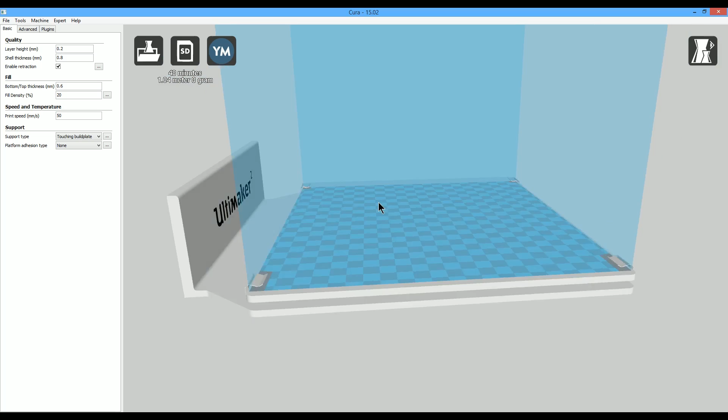All right, guys, so now we got our 3D model, so we have to move over to our slicer software. Here I'm using Cura 15.02 by Ultimaker. It's their open source slicing software that works with all G-code enabled printers. It's actually my preferred slicer.

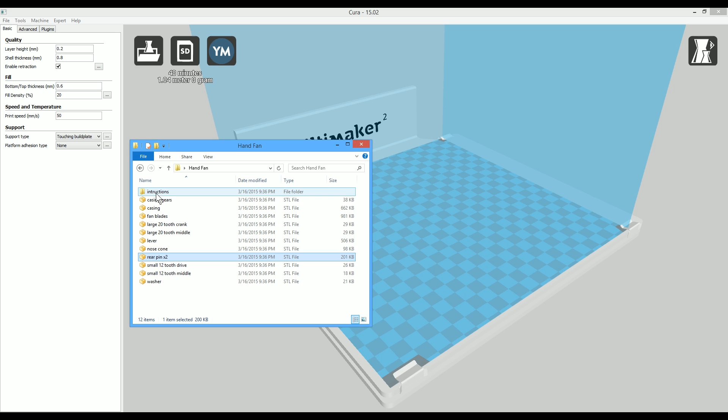So I'm gonna come over here, and I've got the archive I downloaded from MyMiniFactory, and it contains 12 separate 3D models that make up this fan. And one of them you have to print twice, so it's technically 13 parts making up this project. And just like Kirby said on his site, if you click the instructions folder, you got step-by-step pictures detailing how to assemble this thing. That's great, Kirby. A lot of people don't include that.

So if we come over here and we grab all 12 of these files and we drag them over to the build platform in Cura, it's going to go ahead and slice them. And you see we already have a problem. See the gray pieces? These don't fit on the build platform, so we can't print this all at once. So we're going to have to break it up into a couple of different prints.

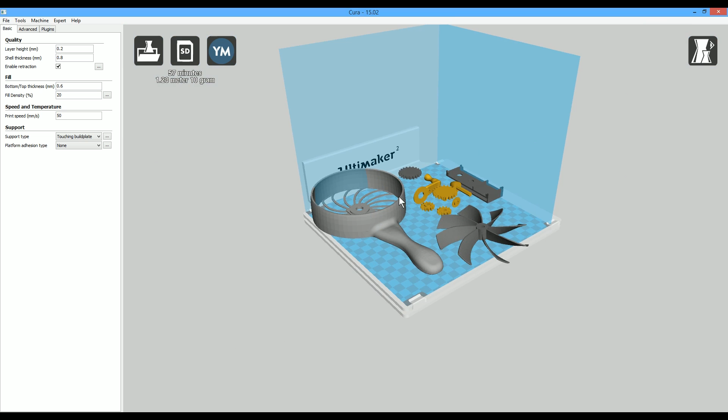So let me go ahead and clear the platform. And we're going to start off by printing the two largest things. We're going to take the casing file right here and the casing gears, and we'll move those over on the platform. Those are the two biggest, most central parts of this project. But we still run into a problem, and that is this is gray because it doesn't fit on the build platform. So we're going to come down here and just simply rotate it a couple of clicks.

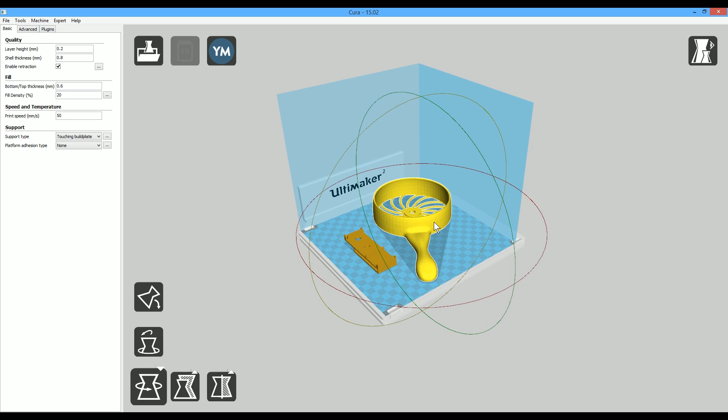And now it fits. And then we run into a problem with this, and that is when we load the part, you notice it's oriented where if we print it this way, it needs a ton of support material in between these two guys right here, and it needs a lot of support material over here also. So that's a waste of support material, and it's going to be a long cleanup. So what I think we should do instead is just simply rotate this part on its side.

Now when we print this part, what's going to happen is you're just going to have a little overhang at the top of the circles. Everything else is going to print perfectly with no support. And then I think these little nubs are so short that it's not really going to matter. I don't think they're going to need support either.

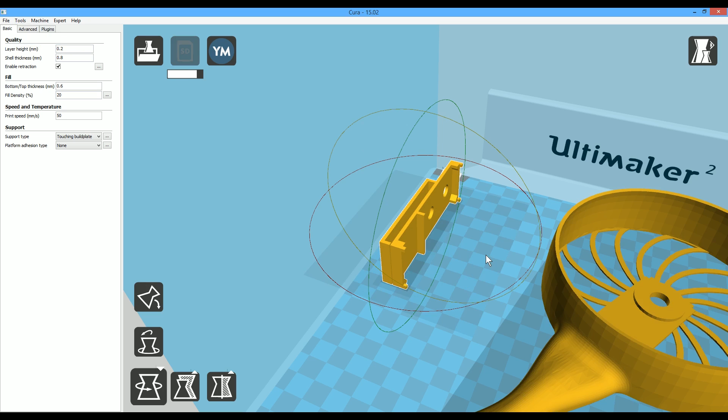One other thing I'm going to change really quick is I'm going to go up to tools and I'm going to go to print one at a time. Now what this setting does is it actually changes how the printer approaches printing this. What it would normally do is it would print a layer, move over, print that same layer, go up one, keep going back and forth until both items were printed. Well, by changing this mode, if I come over to the layers view, you can see it's going to print one item first, and then it's going to print the second item.

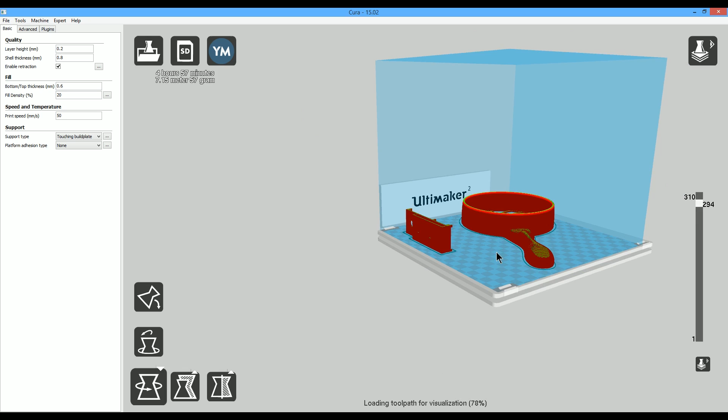And the cool thing is you get a lot higher print quality when you do this, because when it has to pick up the print head on each and every single one of the layers, it usually deposits like a little plastic booger or a little defect where it starts printing again. And it's just more that you have to clean up. So you're better off if you can do it this way.

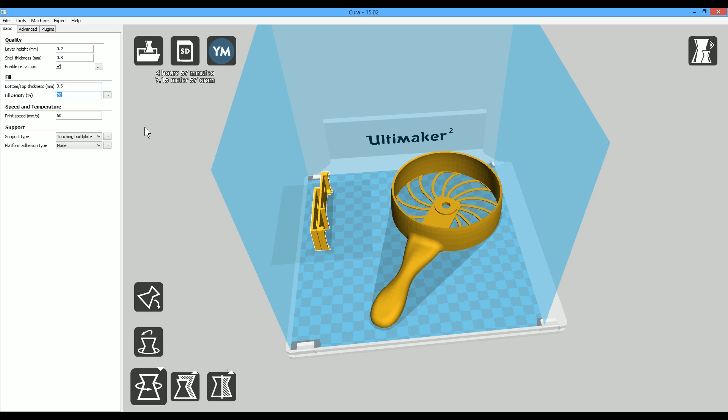All right, so printing out this model, we're actually going to use a 0.2 millimeter layer height. We're going to do a fill density of 50%. So we're changing things up a little bit and trying to make it stronger than Kirby's attempt. And we're going to print at 50 millimeters a second, which is just the default setting for the Ultimaker 2. And the material we're going to be using is called colorFabb XT, and it has a melting point of about 240 to 260 C. So we're just going to sit right in the middle at 250 for this print.

Now, once that first print is completed, we're going to have to print the remaining parts. So I'm going to go ahead and drag the last 10 parts over here to the build platform.

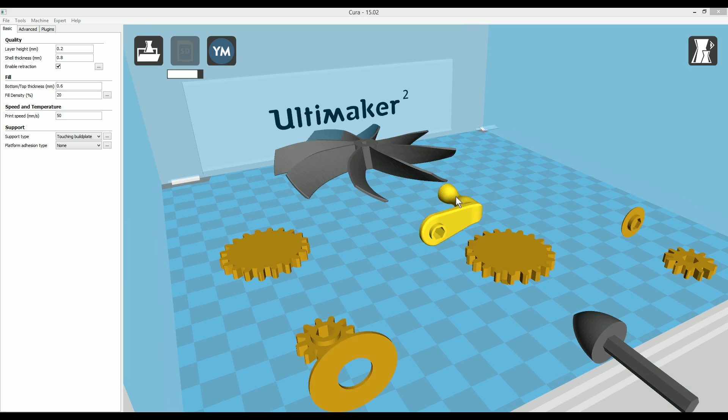And you can see they don't fit very well, and that's because we have it set up to print one at a time. This time, we're going to go ahead and compromise and say print all at once. Now, the biggest problem that we're going to run into here again is that the pieces are oriented incorrectly. So you basically have to take these gears, like this guy right here, and you're going to want to rotate it around 180 degrees. You're going to want to do the same thing with this guy right here.

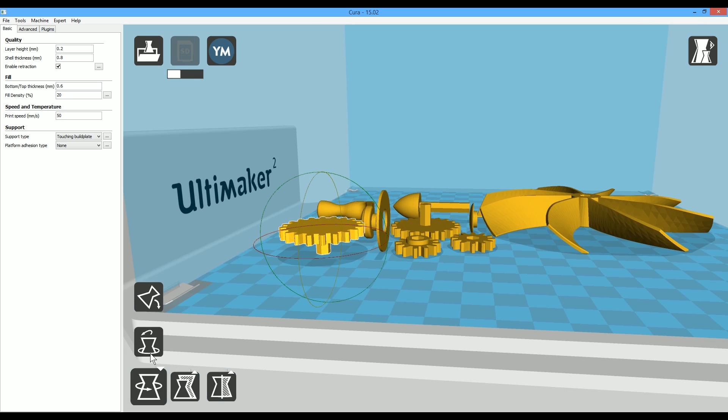You're going to want to take this cog and rotate it around 180 degrees. Same thing with the washer right here. Let's go ahead and grab the little washer. And we're going to rotate that around because you want these to lay flat, because that way they don't need any support material to print. They'll print much faster and much cleaner.

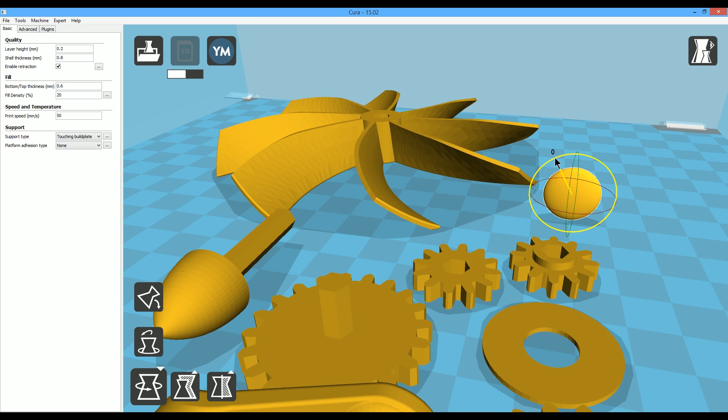Now, I have a little experience because I've already printed a couple of these out, playing around with different orientations, so I could give you guys really good information in the video. And that's how I discovered these new settings that I'm using. Like, for instance, these little end caps, I lay them on their side and I go ahead and enable support material for touching build plate. That way it just puts a little bit of support material around the rim, but it keeps this hex hole very, very clean, which is what you want.

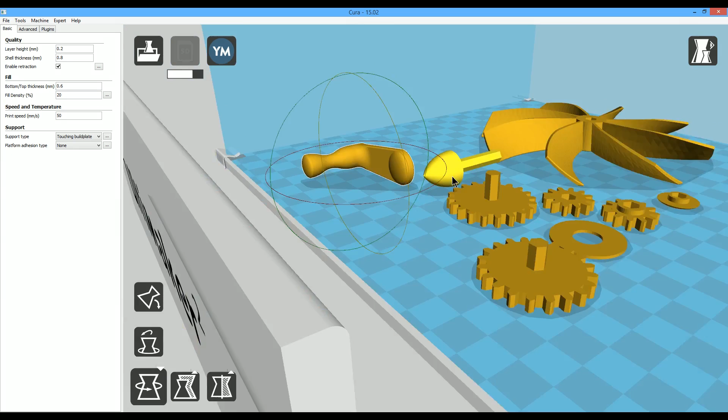Now, I played around with the handle a little bit, and I found the best way to print the handle for this particular model, at least for me, was to rotate it up on its end so that the hex nut is facing down like this. That way you just get a little support material underneath here, but it keeps the hex hole very clean. And that's what you ultimately want to do, is you want the connecting parts to fit together well.

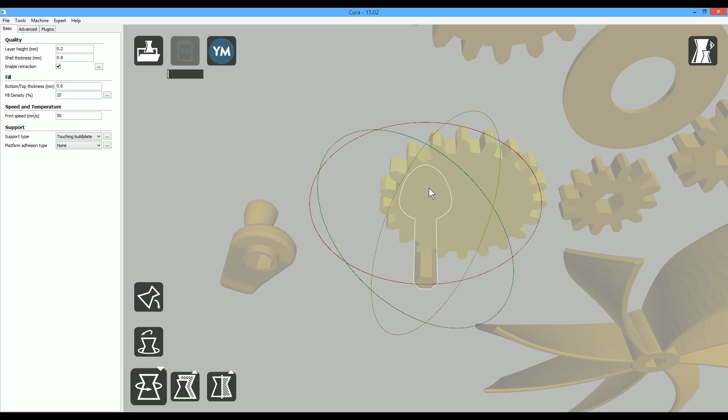And the same thing with this. I found that printing it on its side, the support material is really hard to clean away, and the cone wasn't very uniform. So instead I print it up and down, and it basically builds a little support tower underneath it, but it comes out much cleaner. All right, guys. Well, now we've got all of our parts all set. Let's get them printed out on the 3D printer and start assembly.

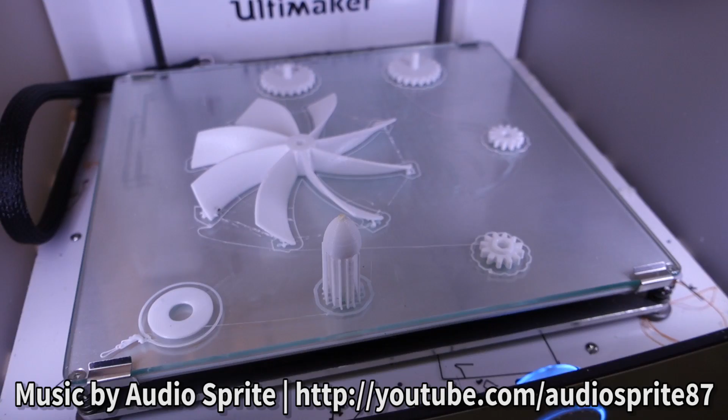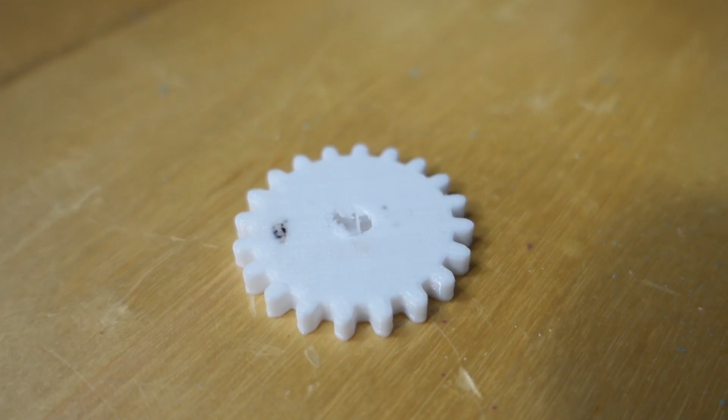All right, guys, so here we have all the 3D printed parts that we need to assemble this thing. Now, you might notice after the time lapse that a couple of the pieces are blue. Now, what happened was I had some problems 3D printing this, because when I first started, I was using a 15% infill on the parts, and this is what I ended up with. I got these little cogs and gears, but you can see they weren't strong enough. I actually broke a pin off of this cog right here. And had some other problems with the handle cracking because it was too brittle at 15% infill.

So I took all the 15% infill parts that were a part of the mechanical systems, and changed them out with 100% infill, and I figured while I was doing it, I'd do it as a different color. That way I could tell which parts were 100% and which parts weren't. So I printed out all of the parts that have tension on them. Like, for instance, the hand crank has a lot of tension on it. This piece, the spline that turns the fan, has a lot of tension on it. I don't really know why I have 2 hand cranks, but we'll figure that out later.

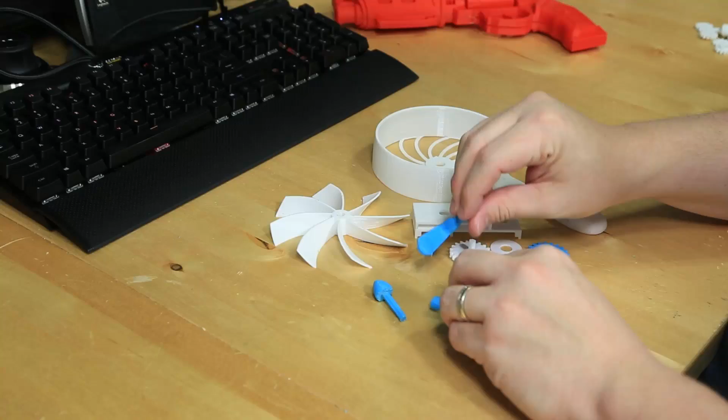I also have 2 little cogs right here that are 100% infill, and then the 2 big cogs that are 100% infill. Now, all of the white pieces here are printed in colorFabb XT material, which is amazing. It's a very high melting point material that you can use that's much like ABS, and it's very strong compared to just PLA. Now, these blue pieces here are printed with Ultimaker PLA, which has a way lower melting point, but I figured this isn't going to be exposed to any drastic amounts of heat, and I'm not printing it in black, so I figure it'll be fine.

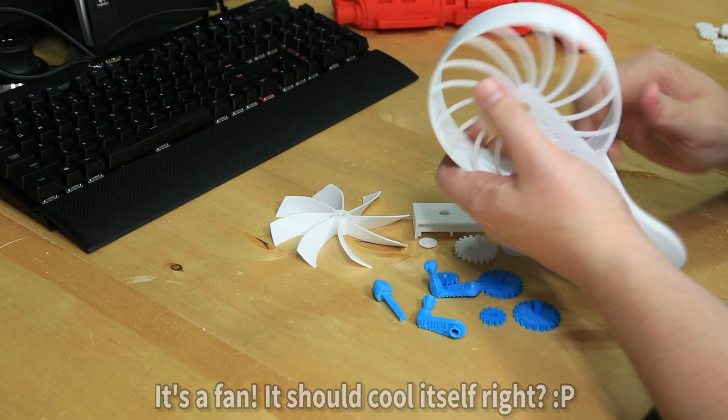Now, another problem I ran into printing the fan was, you notice some of these little pieces on the back here broke.

And I can just re-glue them, that's not a problem, but when Kirby made the model, he made these incredibly thin and delicate. If it was printed in ABS, I don't think it'd be a problem because there'd be more flex to it, but while I was torquing on it, doing the test assembly of the fan, I actually did break those. So we're going to go ahead and glue those during the final assembly.

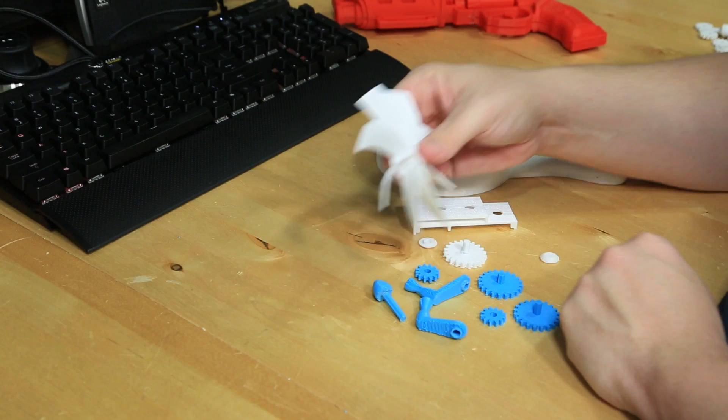Alright, to put this bad boy together, you start out with this guy, obviously, but we want to take the fan blades, and you want to put a washer. You 3D print this little washer right here. You want to make sure you get it in there, because if you don't put the washer in there, you get too much friction, and it doesn't turn. So now that we've got the washer in there, we're going to go ahead and put the spline through. That's this little blue guy right here in the nose cone.

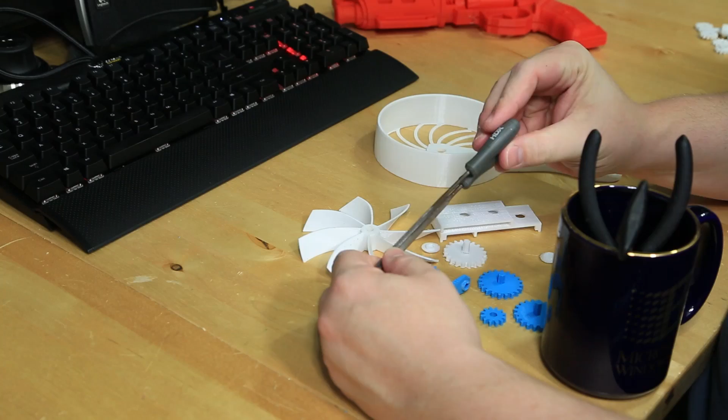So one thing I noticed when I first assembled this was things didn't fit together quite right, and it's because Kirby modeled this to very, very tight tolerances. So what I recommend is get yourself some tools. I use these little files right here that I just picked up. They're HDX files. I got them from Harbor Freight, I believe, or Home Depot, or one of those places. And I also picked up a pair of pliers, and I was just using some random thing here as a punch to separate parts.

So what I generally do is I get a couple of files that are different shapes, and when parts don't fit well together, I just take the file, run it down, and clean up the edges, and get some of the debris and some of the little boogers that sometimes happen during 3D printing, clean those out. And then I'll do the same thing for parts like this, where I printed it and it had support material on it. You can see where the support material connected to the center of the shaft. I use a flat file and I clean that up.

Now, I already cleaned these pieces up a little bit. I could be a little bit more meticulous, but you can tell where the support material was under that little guy in particular. It's pretty rough, so you want to clean that up.

Alright, it's time to assemble this bad boy. So what you want to do is take your fan blade here, your little impeller, and then take this little washer and put it on the back side of it, because you definitely need the washer. If you don't, you get too much friction. And then we're going to put the spline through on the front here. It doesn't really matter which way you put the fan on, because either way you can just spin the handle the opposite direction and get the same effect. So now we've got the blade, we've got the spline on. Now we're going to go ahead and put it in through the back of this.

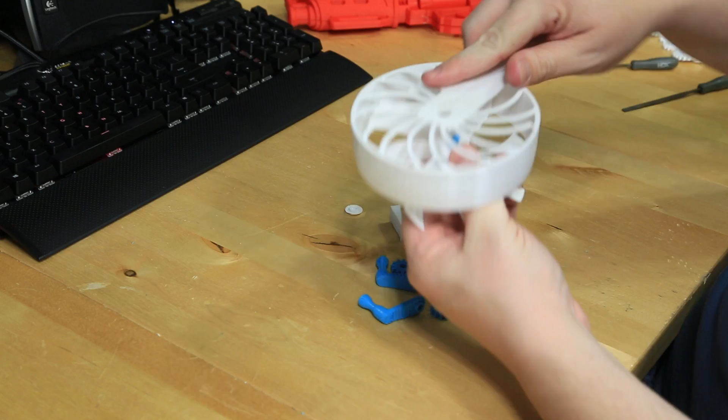And then we've got to grab this little cog here. It's the one that has a little lip on the top of it, and that's actually the bushing that holds everything straight. So once you push all those parts together, and it may take a little force, there we go. So that bushing now keeps the fan blade centered as it's turning so it doesn't hit the housing. And you can see it spins nice and free. That is a really, really good sign.

Alright, so now that that piece is assembled, we're going to take this. This is the gearbox right here. This is where all the magic happens. Now, I 3D printed 2 gears here. You can see one has a shaft that's slightly longer than the other one. So we want to take the one with the really long shaft. I know that sounds wildly inappropriate, but just trust me on this one. And see, it goes up through the little center hole there.

Now, there's another cog that you need to line up with it. So you basically put this cog in between like this. I usually just get it lined up using a file or a little pick or something like that. Then you just want to put this guy up through the bottom.

And now you can see those 2 pieces connect up through there. And then I 3D printed these little cap pieces. And these little cap pieces just act as bushings and hold it in place. So we're going to go ahead and push one of those on. But the problem that I noticed with this is if you spin it, the cap will eventually fall off. It doesn't hold on very well. So we're going to actually glue a lot of this when we're done assembling it.

So go ahead and put that cap on. So now that piece, notice it doesn't move around. It just spins on its little axis. That's perfect. Now we want to take the other big cog, and these 2 pieces separate. They bend. Don't bend them too far because they will break. So let's go ahead and put that in there. And now you can see all of the gears mesh together.

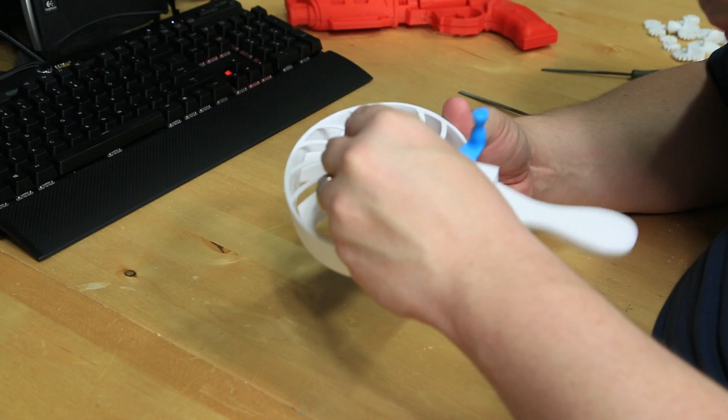And now if you look in the back here, you can see all of those gears line up from the handle, the big gear, to the little gear, to the second big gear, and then the second little gear on there. And then the only thing left to do is take the final cap and put it over the little drive shaft. And as you can see, the cap does not want to grip on there very well. Let me try one of my blue caps. I actually printed it with a little bit thicker Z-axis so it'd go further down in the hole. And it actually looks like that holds much better. So let's go ahead and replace those.

I'm going to take the white ones off. All I did for these, Kirby, if you're watching, is I just extended the Z-axis by like an extra 0.5 millimeter, just to make them a little thicker so that they went down on the shaft just a little bit more.

I swear you can't say shaft without sounding dirty.

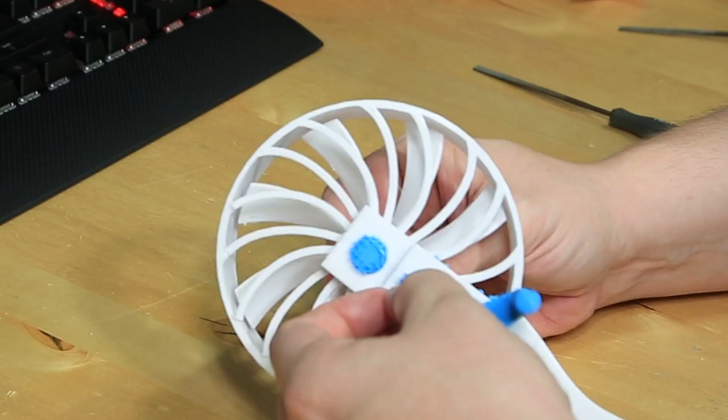Now, as you can see, when I turn the fan, the handle turns. That is a good sign. That means all the gears are meshing. So now let's see if we can turn the handle and turn the fan. And see, it's binding a little bit. See, and it's kind of falling apart because it's not glued. Let's go ahead and just get it to where it'll actually turn. You do kind of want the gears to be a little bit loose fitting, because if they're not, they do bind. So look at that.

The fan is turning. Go the other direction. Okay, so that's our assembled fan right there. Now what we're going to do is we're going to get the hot glue gun and fix a lot of this stuff, and we're going to glue the back down to the rig, and we're also going to do some gluing in here just to make this thing completely solid and function as expected. Okay, so the first thing that I'm going to glue is I'm going to fix the fan shroud where all the blades broke.

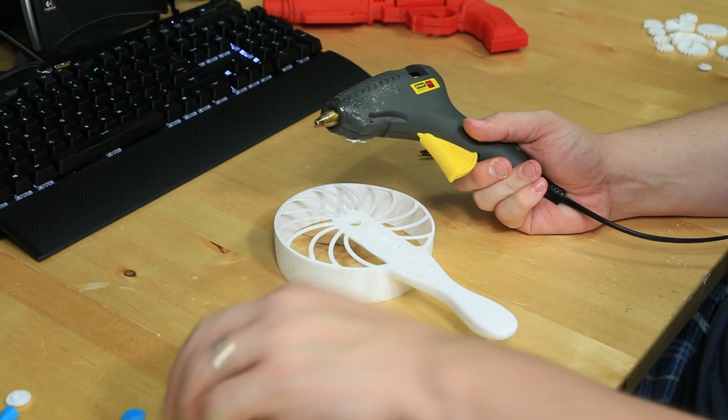Now the cool thing about printing in the colorFabb XT material is it has a much higher melting point, so using hot glue with it actually is easy to do. Now with the PLA, you tend to have a little bit of melting problem because the PLA has such a low melting point. But if you just use a little dab, it'll be fine. So let's go ahead and just dab the back of these guys. Alright, well, it might not look super pretty, but I've got everything all glued into place. So now my grill isn't going anywhere.

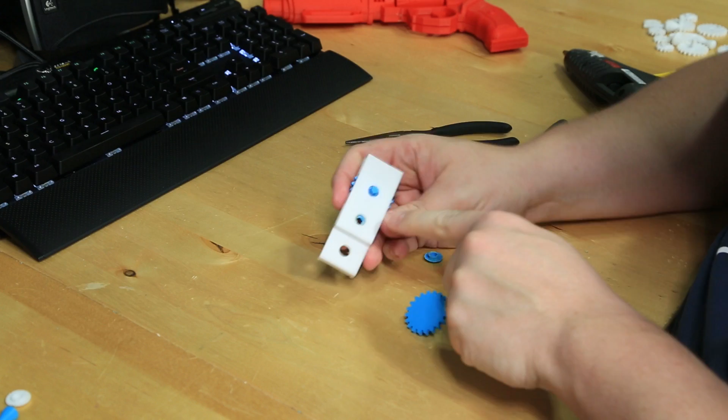Alright, now that that's done, let's go ahead and focus on the gearbox. So let me go ahead and reassemble my gearbox here. And then we want to glue the cap on. Now you want to be careful because you don't want to glue it to the structure, otherwise the gear won't spin. So let's go ahead and just put a tiny, tiny little dab of glue. Okay, that was probably a little bit more than tiny. Alright, well I made the mistake and used too much glue, and it actually welded the gear in place, so now I gotta break that free.

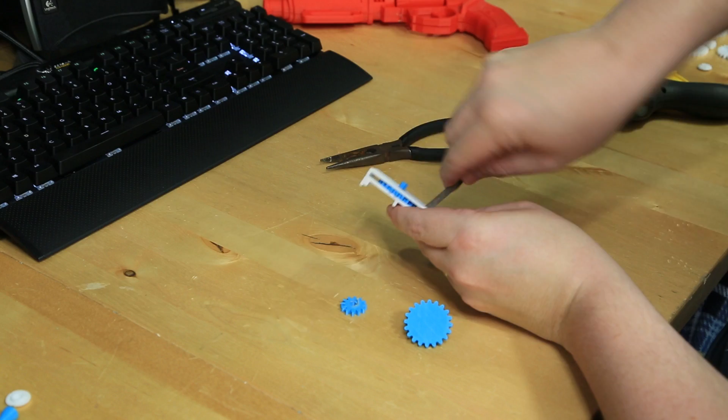Alright, so now I got a little hot glue on the outside of that hole, which is gonna drag on that gear, so I need to clean that out. So I'm just gonna use my file and scrape. A lot of glue got up under the edge too, so you just want to make sure you get all that out. Basically, don't make this mistake. I show you the mistake so you guys don't have to make it. Now, I kind of wish I had super glue, because I think super glue would be much better suited to this, because the hot glue, there's just so much of it.

Let's go ahead and make sure the cap and hood still fit together. And turn. They do. Alright, this time I'm just going to put a tiny, tiny little dab on top of the gear. Like super tiny. There we go. The problem with hot glue is you have to move pretty quick because it solidifies very quickly. Alright, that's much better. I'm going to go ahead and turn that. And I'm going to keep turning it until it sets, just to make sure if there is any glue in there, it doesn't set up and grab the wall.

See, as long as that's turning, we're good up there at the top. See the cap's turning? That's good. You can see the gearbox turns. It gets looser as you turn it more because it basically is wearing the gears in. Now, I'm not going to glue the handle because the handle actually seems like it snaps on there pretty good. So we're only going to glue the parts that we really need to. So now that I know that the gearbox is actually functioning as it should, I'm going to go ahead and glue this back edge here so that it can't lift.

Alright, so now the back of the gearbox is glued in place. So you can see everything's working. And it's not coming apart on me. The cap's not flying off. And it's turning very, very smoothly now, which is good. But we'll even lubricate it later and see if it makes it work better. Alright, so now we need to do the same thing with the fan mechanism, now that everything's dried and the little splines aren't pushing out anymore.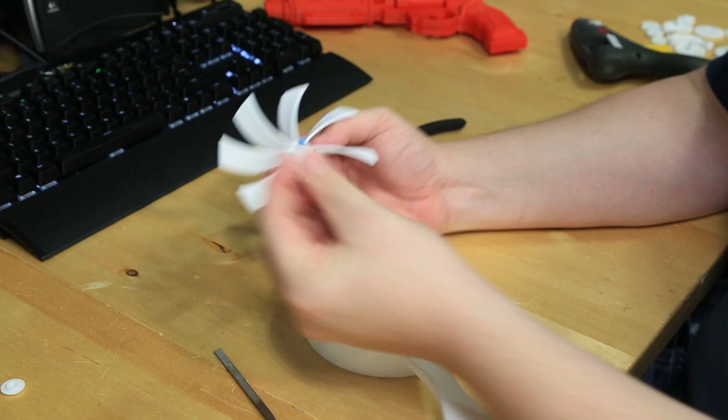Okay, so now we have to add the washer. Do not forget that washer. Then put it through the back. Then put our little bushing on it, little blue guy right here.

And now you can see that spins very, very free. That's exactly what we want. We want that thing to spin super, super free. If it's not, you're going to have trouble. Since it is a step-up gear, for every revolution of the handle, you're turning this thing several times. So you want everything smooth as silk.

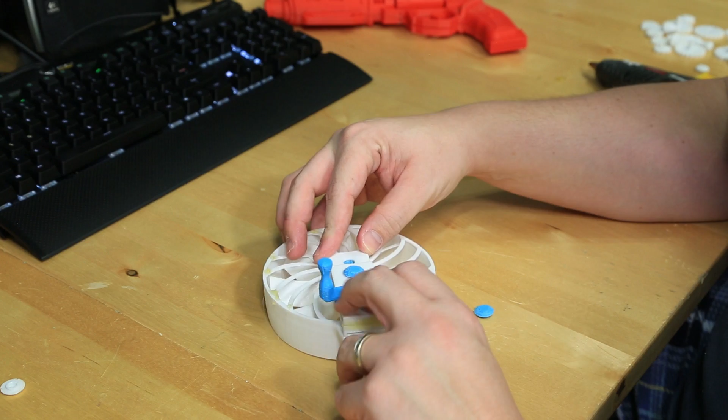Okay, let's go ahead and apply the gearbox. There's little notches that it just goes right into. And there it is. We can see everything's turning. You want to make sure everything turns before you do the final gluing here. Everything's turning good. Alright, we'll see if we can get that to attach later.

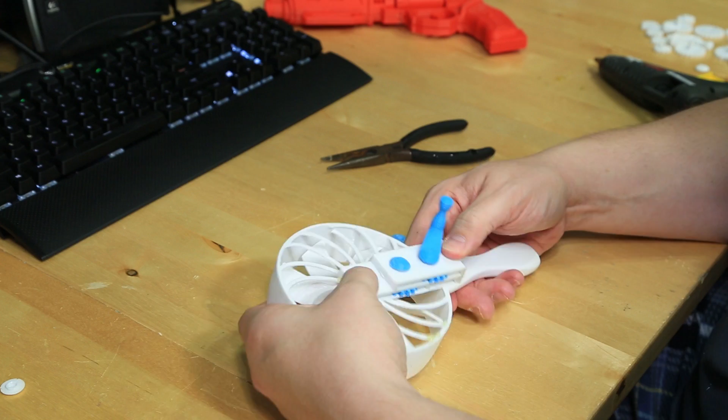The last thing I'm going to do is, now that we know the gearbox is working, you can see down here where everything is attached in the little notches. Everything lines up. He modeled it to be just like that. So everything's attached. Now we're going to go ahead and just do the final gluing. So I'm going to go ahead and glue the base right here. I'm just basically going to run a string of glue across the bottom.

Okay, that's gripping pretty good. Let's go ahead and spin it around. Now we're just going to glue the front. Make sure you don't get any glue down on the fan blades, otherwise this whole thing will just stop working. Whew! I literally just ran out of glue.

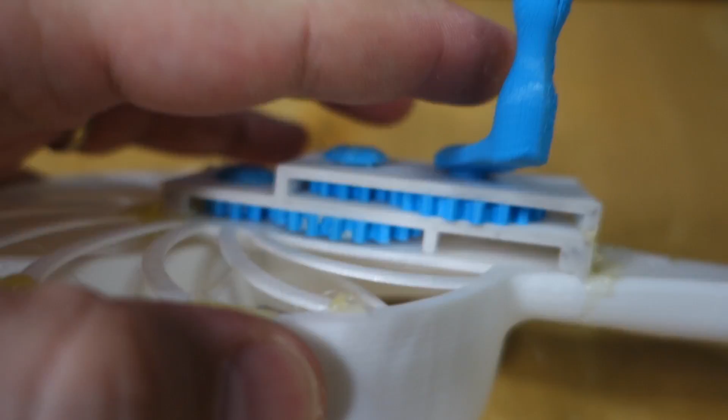Alright guys, well I finished, and I've made quite a few mistakes on this, yet we still got to the end result. For one, if you look at the gears inside, I actually did get some hot glue on them, and I could use a little dental pick or something and get it all off of those gears, but it's working, so I'm not going to do that. But I did learn a lesson. Be really careful with the hot glue. I got really impatient and gobbed it on and didn't wait for it to set up, and it was dripping into places it shouldn't have been, and it caused big problems.

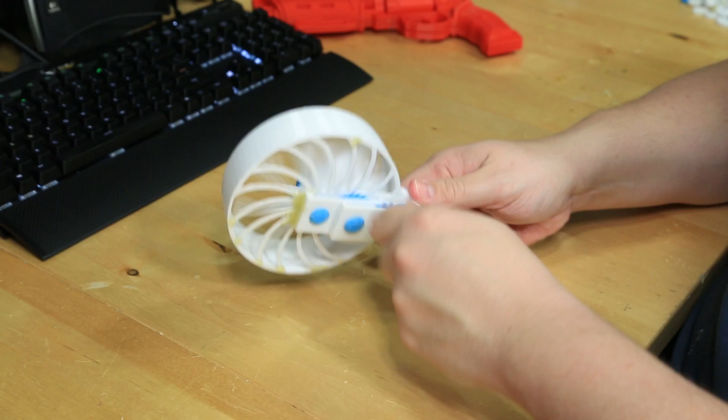But as you guys can see, the fan does work. Like this. You can even crank it as fast as you can, and you do definitely feel a breeze. Now, when you do turn it and you point at your face like this, you do get a gentle breeze, but it's not really effective. I mean, to be honest, you probably wave more air at yourself with your hand.

And the other thing I noticed, when you turn it backwards, it tends to bind up. Because what happens is, the blades catch the air and they flex a little bit. And as soon as they flex from the pressure of the air, they grab onto the little splines, and it stops them from spinning. Like if you go really slow, it works fine. But as soon as you try to go fast, it just binds up instantly. But this direction, you can see all the gears are working. Everything's all glued together, so it's not coming apart.

Alright guys, so the last thing I'm going to do to improve on this is, it does actually spin pretty free, but it does bind a gear every once in a while. And you do feel a little bit of friction. Like you notice when I let go, it doesn't just keep spinning very long. It just stops. So I'm going to see if we can actually put a little silicone oil. This is, I believe, 60 weight silicone oil for RC cars. I'm going to put a little bit of this on the gears and see if it smooths things out.

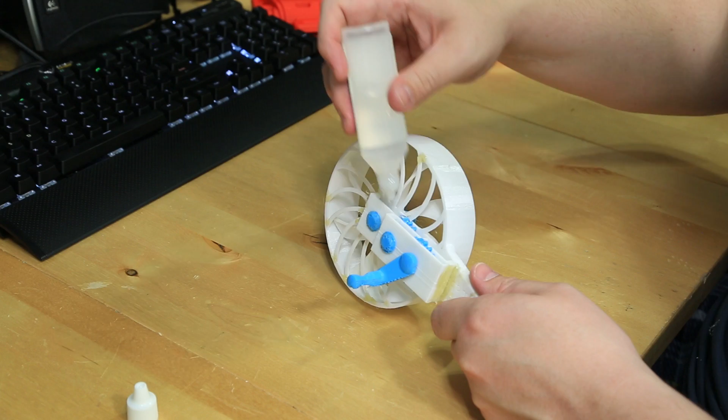Let's put a little drop on each gear. Oh, wow. That immediately made a big difference. Just the feeling of it now. It spins so much smoother. Hey, lube it or lose it, right?

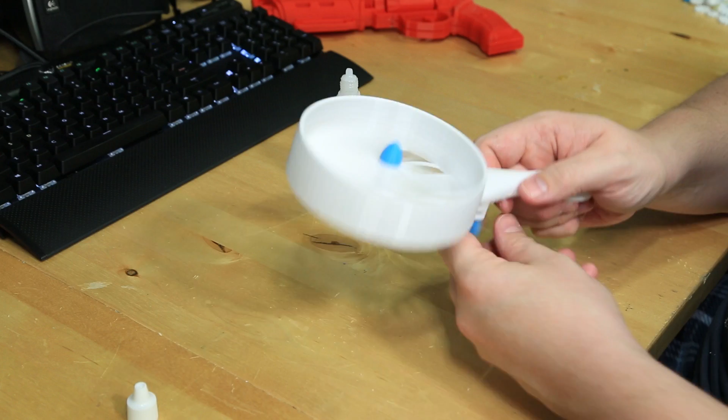The only other thing I'm going to try to lubricate is, you guys remember that little washer behind the fan? I'm going to put a drop on that too, just so that it has a tiny, tiny little bit of lube on there. I'm going to work it down in there. So now the gears are lubed and the washer is lubed.

Whoa. Watch. See how it keeps spinning now? Everything's well lubricated and working. So I'll make sure I go and add all these details on Kirby's design.